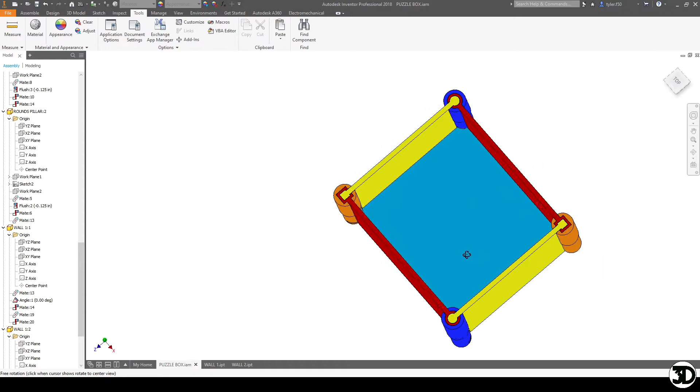In this video we're going to discuss the designing of these walls. They will be prone to change, but this will at least be the starting point for how these components work together. First thing you'll notice is the utilization of the detailing we did in the last video, and I'm going to go through how this is going to work. Let's start by looking at these front red walls.

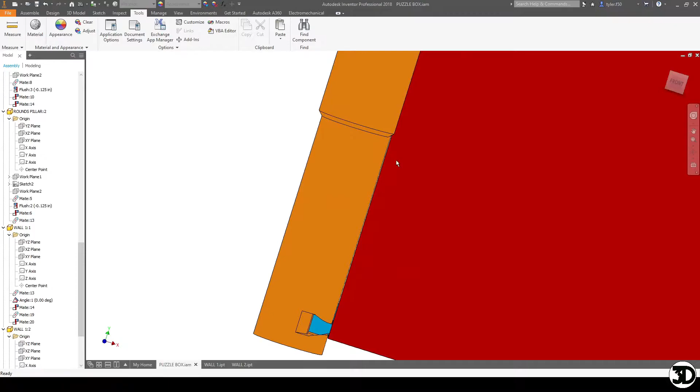Here you can see that this wall is going to actually look a little different than what it appears to look like in the actual component. There's a gap that runs along the diameter of the part, and the reason for that is just for fit reasons.

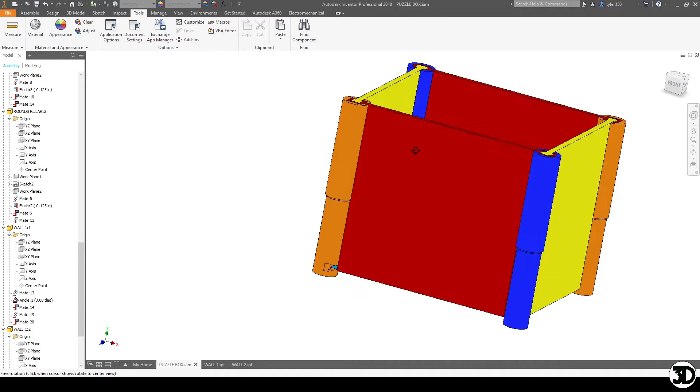So if we go back here, essentially what I did is I measured from center point to center point to get the wall length, and then did the detailing to match what I had for the actual blocks and block and pin portion. I made this block smaller than the outside dimensions from the previous video, and on this portion I made the diameter 10 thou smaller than the outside diameter.

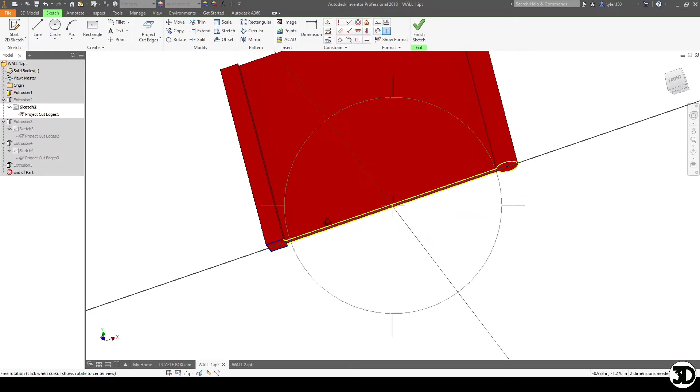Upon doing that, I cut away some material. I extruded this one, and then cut a bunch of the material out to get rid of it. After that, I did the detailing here.

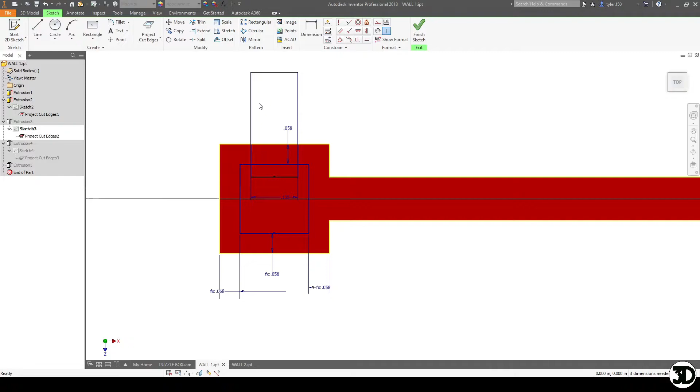So this is me designing the components of the other walls to fit. I essentially made it so that it was 1/16 of an inch minus 5 thou, which is 10 thou in total. That allowed me to have the gap so the other part will fit in there fairly tightly. Then I centered the wall and made it 10 thou thicker, and that's what the wall would be that fits on the side walls.

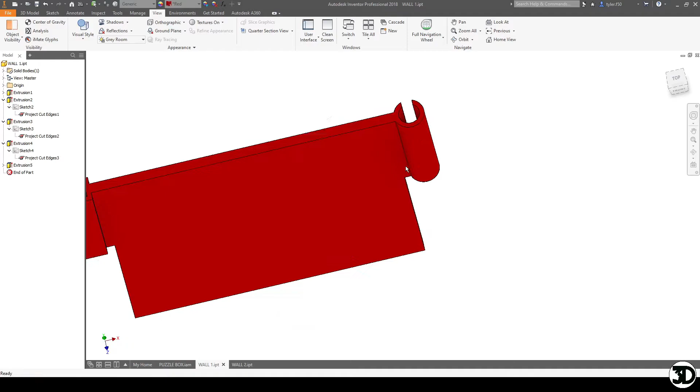Once I did that, it made the cutout as shown, and I also made a bit of a bottom portion so it actually bumps up to something instead of having nothing there. That's completely optional - I just wanted something for it to print in case I decide to print it on this face, or if I want I can print it on this face, but then it still closes up. It also gives a little more rigidity since this is an open spot, making it less likely to break when printed, which is the other reason I did that.

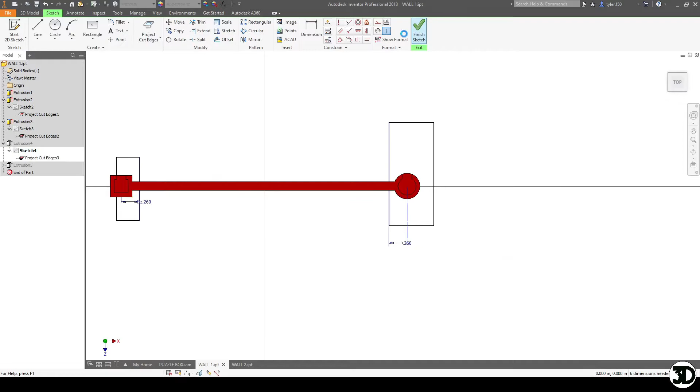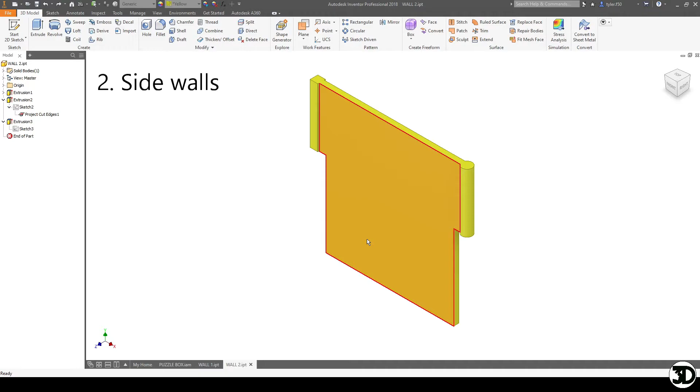Here you can see the other components, the side walls so to speak, and these were much simpler to make. If I go back to the start, I made the wall center to center of the pins here for the width, and the height being the same, which is about 3.5 inches. I then added the detailings here.

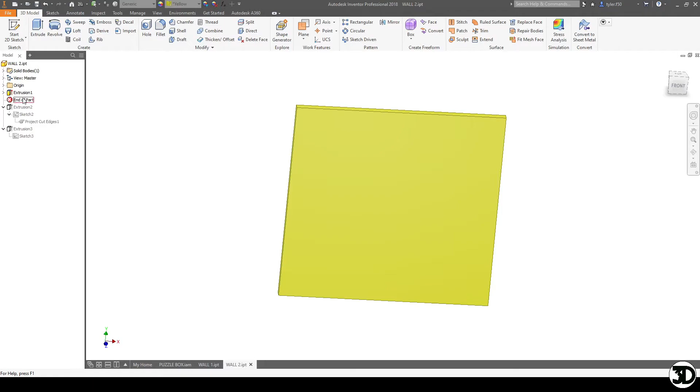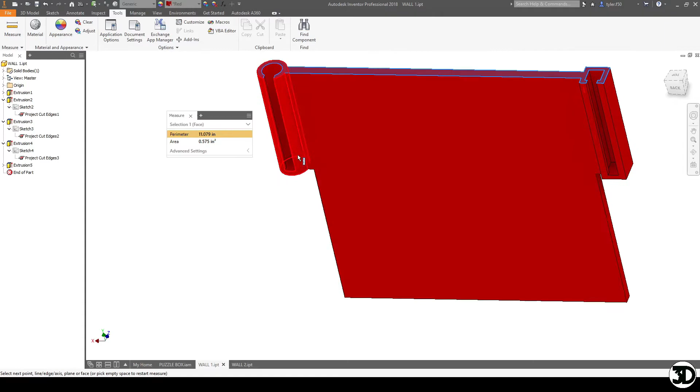Essentially what I did is I knew that the components were 1/4 of an inch and 0.1875, and I extruded that down the distance it would be from the top of here to the bottom of here, which is 1.4375. So I made it that distance.

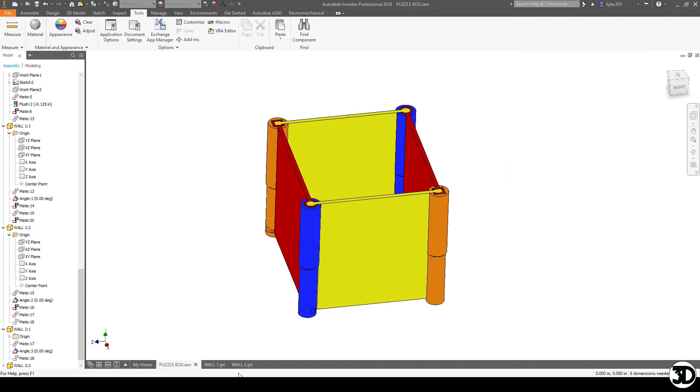The last thing I did is I actually extrude cutted it. The way I did this is I knew that from the center of the pin to the outside of that pin on the bottom, from here to out, it was going to be 0.25, so I added an extra 10 thou, which cut that away, and I did it to the bottom of this piece, and that's what allowed me to have the gap you can see there. So that's essentially how I made this piece.

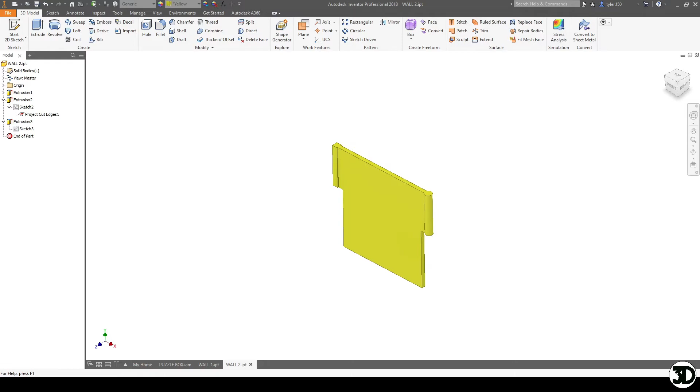Let's take a look at the assembly and see how this actually comes together now. Here you can see the components disassembled. There are two ways this can be done. One is you could fit the walls together first, which is another benefit of having this bottom, and that would essentially look something like this.

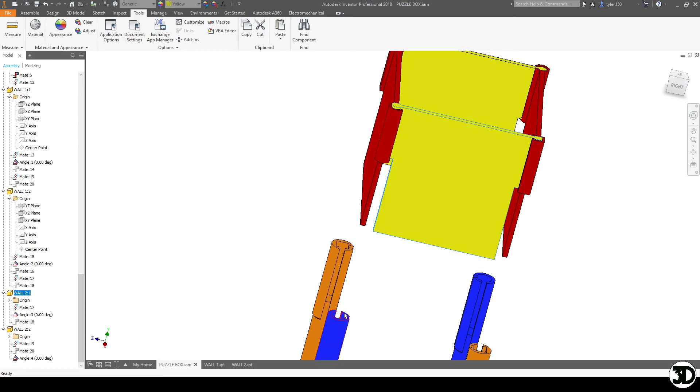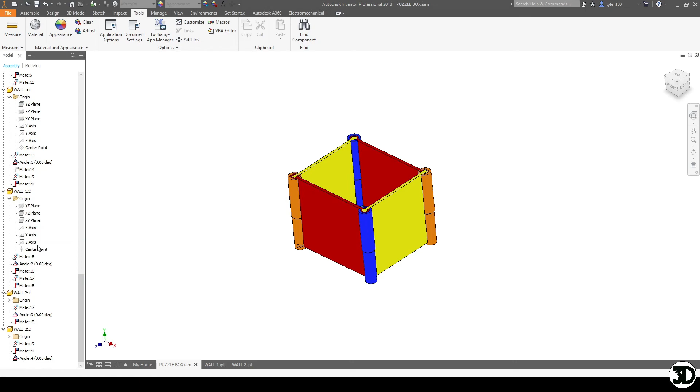Then you can slide it into the actual pins. But what I would probably do in this case is slide the red portions in first to create the alignments, and then slide the yellow portions in second. So then if we take a look at that, with all the components unsuppressed, you'd essentially have all 4 walls put together so you have the start of this puzzle box becoming a little bit more of an actual box now.